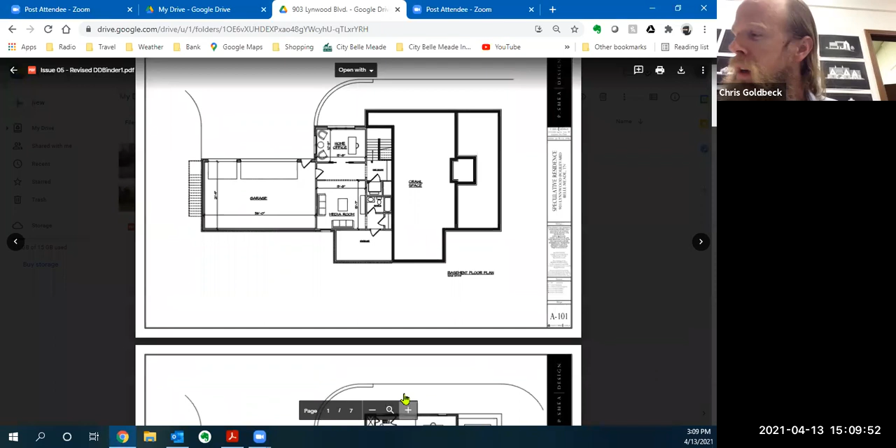Okay, this is Chris Goldbeck with Pichet Design, and I am back in the office this month, so hopefully my internet connection is better than it was last month. So I will just speak to the reasons for deferral from last meeting. Concerns raised centered around the overall height of the house, the space between the top of the dormers and the ridge, the roof form and volume of the back section of the house, the appropriateness of non-functional chimneys, and the shallowness of the roof pitch on the back porch.

So we lowered the roof pitch on the main house from a 14-12 pitch to an 11-12 pitch. This lowered the overall height from finished grade from 35 feet 3 inches to 31 feet 6 inches, so almost 4 feet. And it also reduced the amount of roof between the top of the dormers and the ridge.

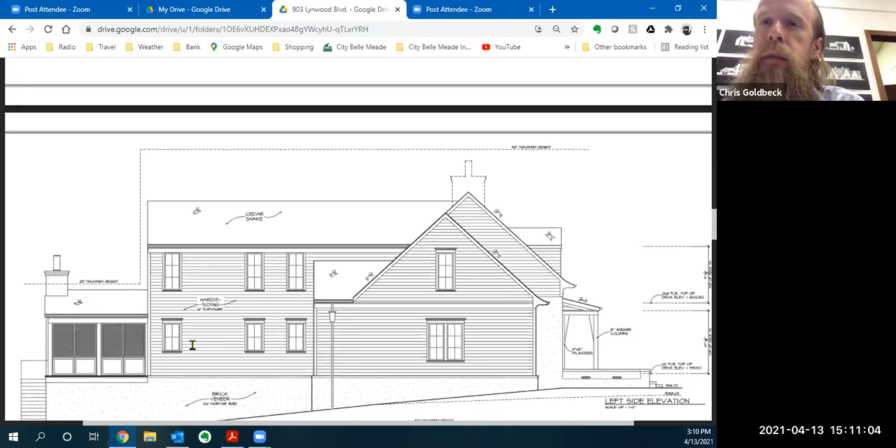On the back half of the house, we lowered the roof over the utility and stairwell to a 3-12 roof, as opposed to what had been a continuous hipped roof back there. And then we also changed the hipped roof to a gabled roof and lowered the pitch from 8-12 to 7-12, so that the back section of the house is more subservient to the main form.

In regards to the chimneys on the front of the house, we dashed those in as optional, and we'll follow the wisdom of the board here, but whether or not those are permissible, our preference would be to have those. I think it would be a nicer looking house on the street. I clarified with John Swift, the builder, and they will be brick, but we understand that if the board wants all chimneys to be functional, then we would remove those.

And lastly, in regards to the pitch of the roof on the back porch, I was unable to raise that pitch because of the height restrictions at the back porch. So that remained at a 4-12 roof. And that's all I have. Thank you.

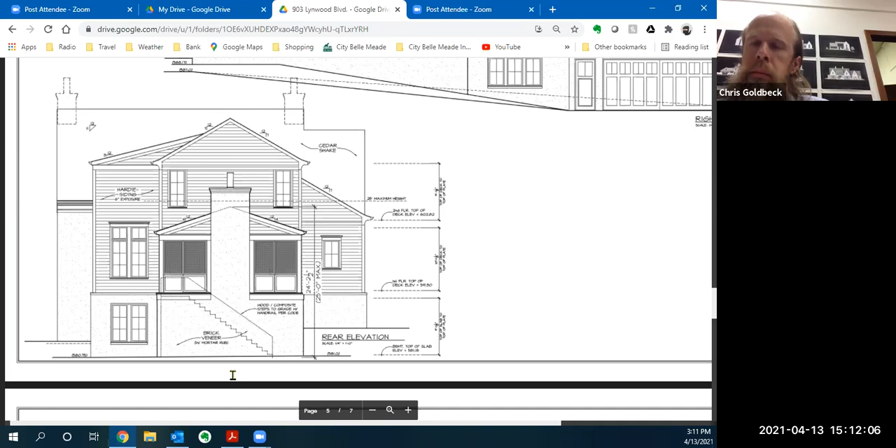Anyone else in attendance who would wish to speak? Yes, Stephen Mason. 4301 Warner Place, next door neighbor.

The elevation from the basic elevation is going up 3 feet in the front, and we're concerned about the amount of runoff rainwater that would send our way, since that house would now be substantially higher than we are next to it. I don't know if that's been a consideration or not. I was hoping they'd put a curb on their driveway to keep that water from running over towards us, since the house is being proposed to be raised 3 feet from natural grade.

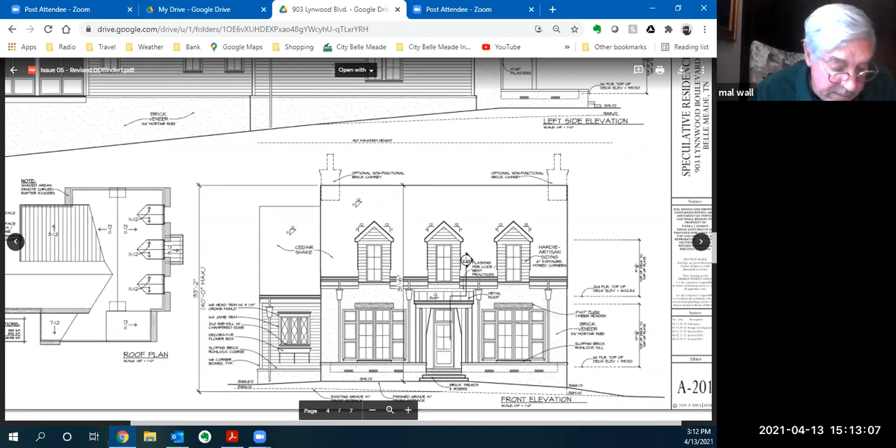Well, Mr. Mason, we on this commission can't address stormwater and stormwater management. That's a separate issue with the city.

Lyle, has the stormwater plan been made for this lot yet? Off the top of my head, I can't recall, but understanding Mr. Mason's concern, I'll definitely red flag this and bring it to our city engineer's attention. The stormwater plan will take into consideration all contiguous neighbors around this property. So Mr. Mason, thank you for your comment. I'll definitely flag that and send it to our engineer.

Can I get a point of clarification? This is Jeanette Whitson. For Mr. Mason's benefit, and this seems to be coming up a lot during our meetings, what are the appropriate avenues for concerned citizens who live around properties being developed to ensure stormwater is being addressed? I think we need to review this now because it continues to come up during our review and it is not part of our review. So maybe we can let people know right now, stormwater concerns should be addressed to whom - call, email? How should that be addressed by concerned citizens? What's the proper avenue? Who is that directed to, Lyle?

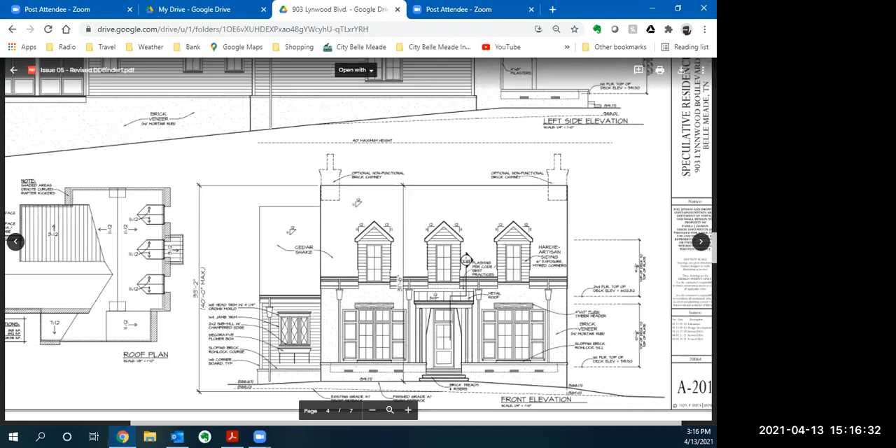Can I ask a question just for refreshment here? Can you tell me the architectural style of this house? Yes, it's French Norman. And can you define that for us, what makes it that? So within various regions of France, there is some variation in the different styles you'll find, and a lot of it has to do with the geopolitical dynamics of the area. For example, in southern France it may take on more of a Mediterranean feel.

This house has the Norman style, yes. So can you tell me what makes this house that style? Yes, having the gables reflects more of the English influence that is consistent with the history of Normandy, with a blending between the two cultures and styles. Oftentimes French houses have hipped roofs, but this one has a gabled roof to be in keeping with that style.

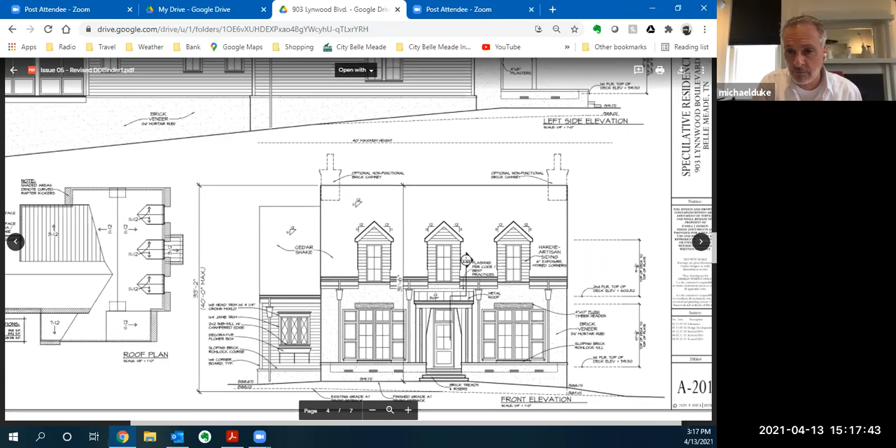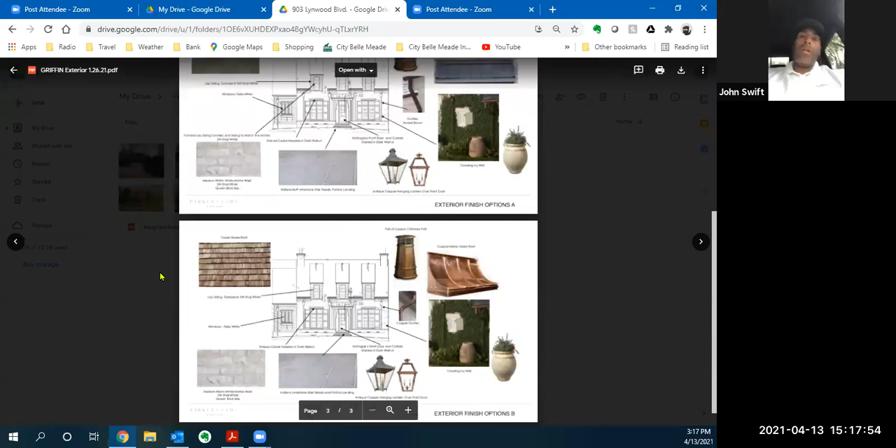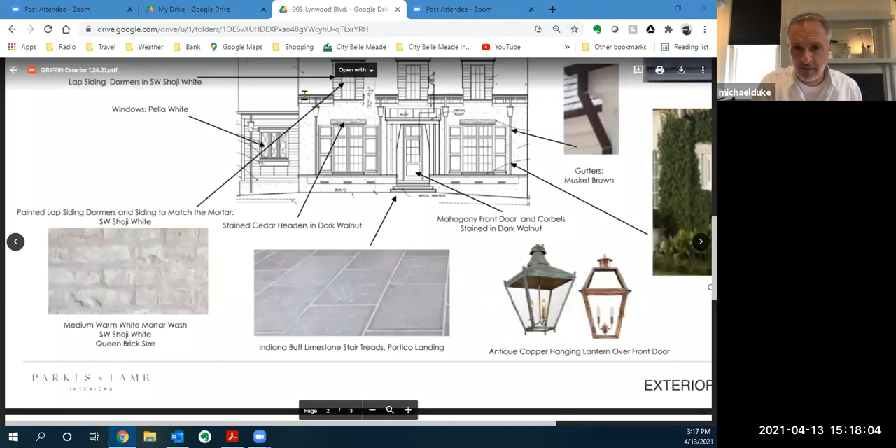Do you have an example of the brick that's going to be used for this house? Is that in the packet, Lyle? Chris, is that in the packet? I see mortar - something, it says medium warm white mortar wash. It's a wash on the brick. So is it going to be another white house then? Shoji white.

Can I see a side view of this? Is this the left side view again? There was... I didn't know, yeah, on that side. That was my question - the shutters are on the right and the front, but they left them out on the left-hand side. And it's going to be viewed on Lynwood from all three of those sides for sure.

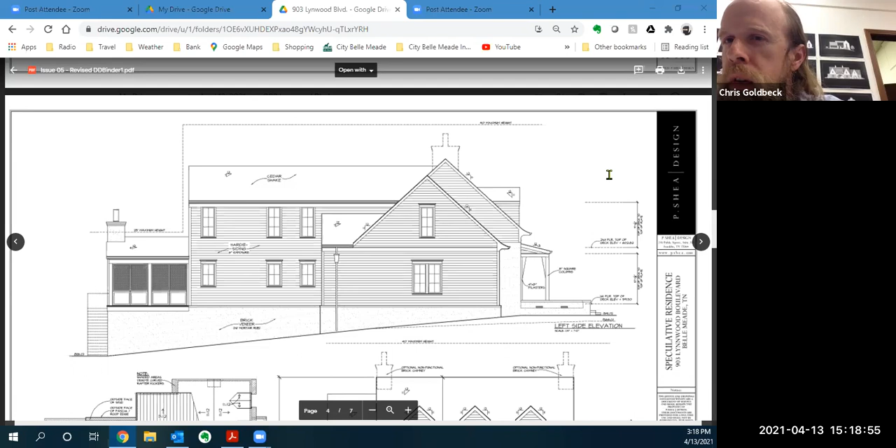Chris, you have a problem with putting shutters on that left side elevation? Are you thinking kind of towards the front, or the windows towards the back as well? Just the windows toward that main body of the front. Yeah, I'd be fine with that. Do you have any other comments?

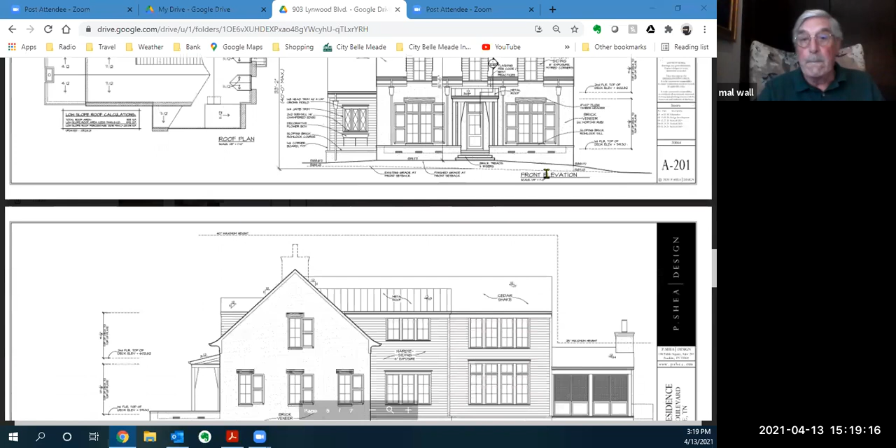Anyone else care to speak? I would like to comment to the neighbor that asked about the grade raise being in our overview. It is in our consideration as we look at it from a style standpoint, but the grading and drainage will all be part of the stormwater plan. So if they've raised the grade such that it's going to not pass stormwater, that will come back through stormwater review. Would that be accurate, Lyle? That is correct.

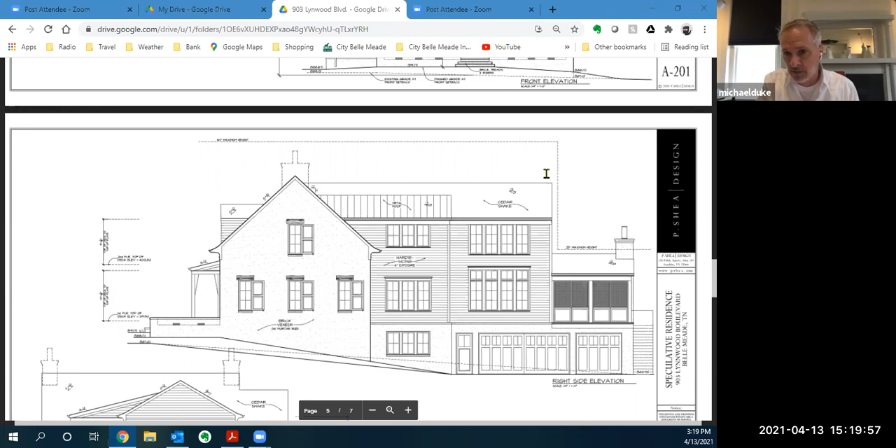Lyle, what is it if you change grade more than 30 inches - is that part of stormwater or is that part of your grading and BZA approval? It would be both. It's really a matter of BZA approval, but then you've got to pass stormwater after that. So you've got two hoops to get through, if you will.

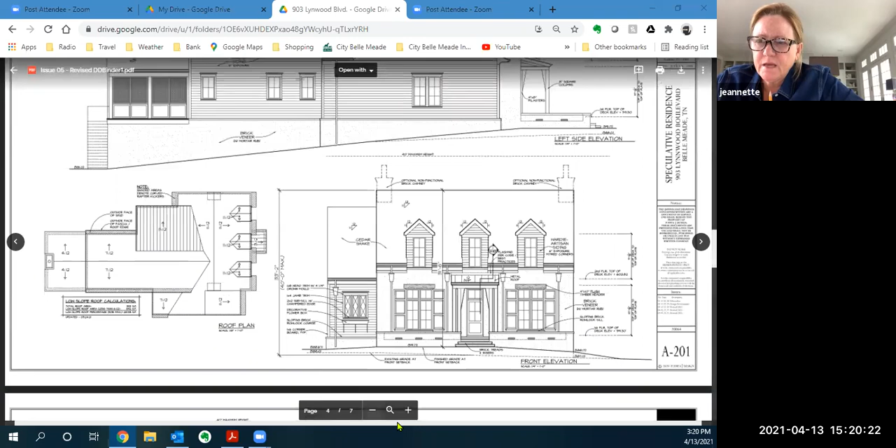And I can't quite see this, but where does the 40-foot maximum height, where are you measuring that from? And I know the house doesn't reach that, and that's what I also want to ask - how high is the house with this 3 foot, and where are you measuring the 40-foot height from? That's the dashed line in front, which is the average elevation of the front setback.

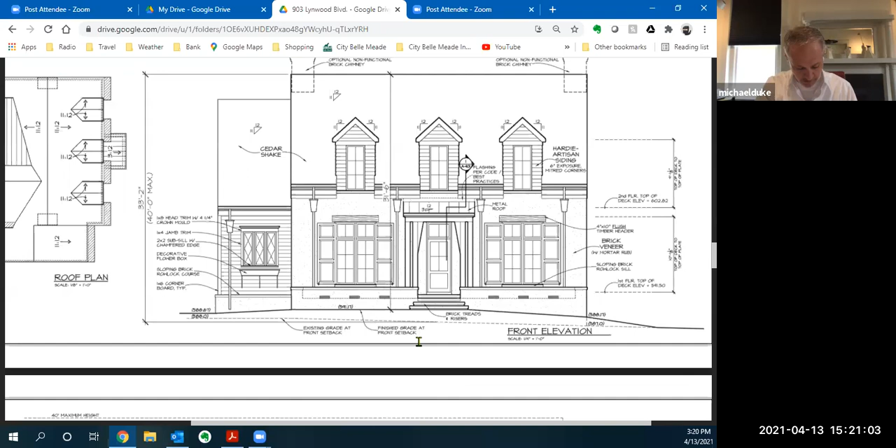And how high does the house sit right now? 33.2? Correct. Okay, so it's well under the 40-foot allowable by code, correct? Yes. Okay, so it's 33.2 from that average natural grade, then, Chris? Is that what I'm reading? Correct. Because it looks like it'd be about 31 and a half. Yeah.

Anyone else? I personally like it without the chimneys on it. It just seems like it's a lot more of a clean design. I agree with Gavin, taking those off - particularly if they're faux, they're not necessary.

Do we need to make that part of this approval, since it says optional on there, Bunny? Oh, we can let Lyle deal with it, I think. Well, we can say we'll approve it without them - is that what you're asking, Gavin? Okay, yes. We can make it a caveat of approval. All right, I should have made that question of the chairman. Apologies, Mal. No worries, no worries.

Can I ask a question? Sure. Little windows that are recessed on the - what elevation are you looking at? Front elevation. Okay, so this - never mind, I think I just answered my own question. Never mind.

Okay, let's close the public portion, and the chair will entertain a motion to approve the design with the modification of removing the chimneys.

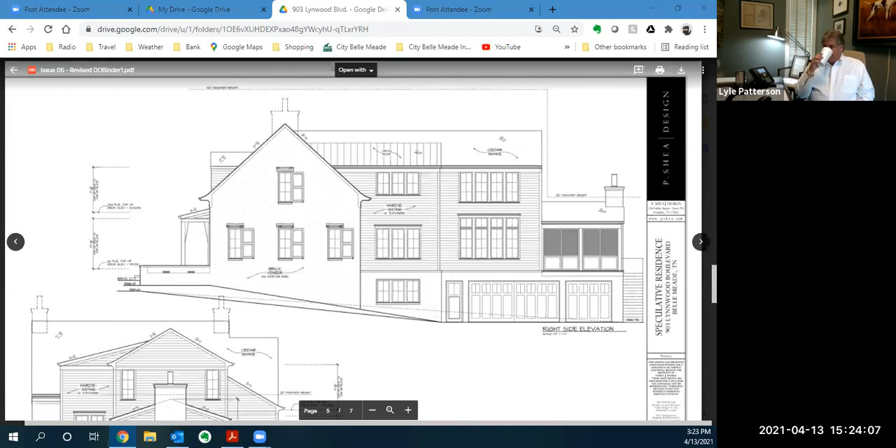How high is the basement ceiling? It is 9 feet. How tall are the ceilings on the main floor? 10 feet generally. Yeah, that's pretty tall for a supposed cottage, Chris. If you were to take a dimension from the top of that ridge down to the garage elevation, what is that dimension?

Well, look at the topo at the front elevation to the back elevation. That'll give you the footage to add to the 33 too.

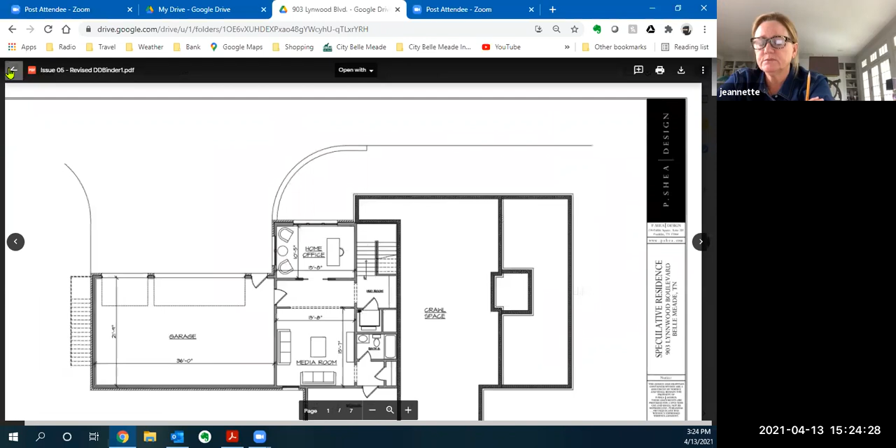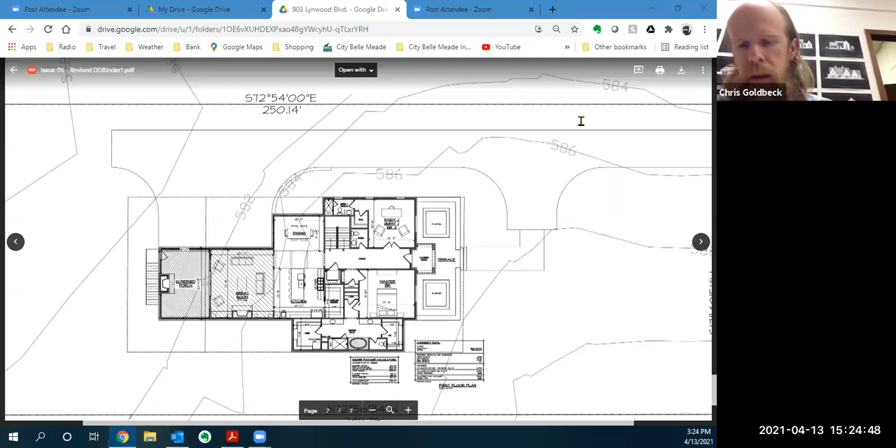I think it's just shy of 40 feet from the main ridge to the garage slab. So it's 40 feet. So you're still under the 40 feet, even in the back slope. Correct.

And I guess if I can answer the question about the grading. The way we position the house is set back 15 feet from the front setback because the grade does fall a little more precipitously as you get back on the lot. So we pushed it back and set the garage elevation based on the lower areas there, and went from there.

So we're building up the grade a little bit in front. On the front elevation, you can see the difference between the solid grade and the dash line there. We are building it up a little bit based on past projects with the board. We heard a desire for less steps at the front, so I built that up accordingly, but nothing falls outside of what's allowed with the zoning ordinance. I think it would be more attractive if it weren't 3 feet, if you didn't have to walk up 3 feet to get to the front porch.

I think those are tall ceilings for supposedly this cottage style house on the first floor. That's a big basement ceiling, high basement ceiling, high main floor. What's the third floor? Nine feet. Yeah, that's a lot of height there. And I think if you could lower it in the front, it would be a more attractive house. I think it's going to even look taller than 3 feet.

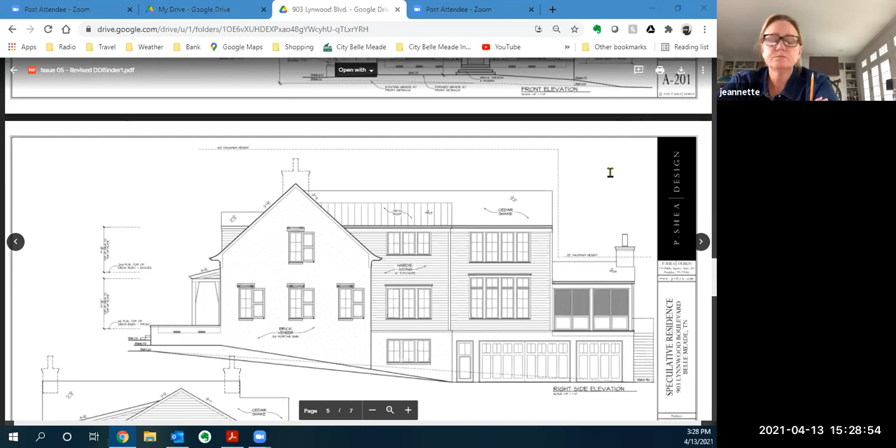Yeah, I know that I've submitted the drawings to the civil engineer to work on the stormwater and grading plan. I don't know if you've engaged a landscape architect yet. No, we haven't engaged anyone but the civil engineer at this point, for fear of not knowing what was going to be approved or the overall footprint once we finally got through. So no, we have not engaged a landscape architect or designer for this.

And can you speak to that? Would you be putting it in, or would the homeowners be putting that in? No, we would have to put it in.

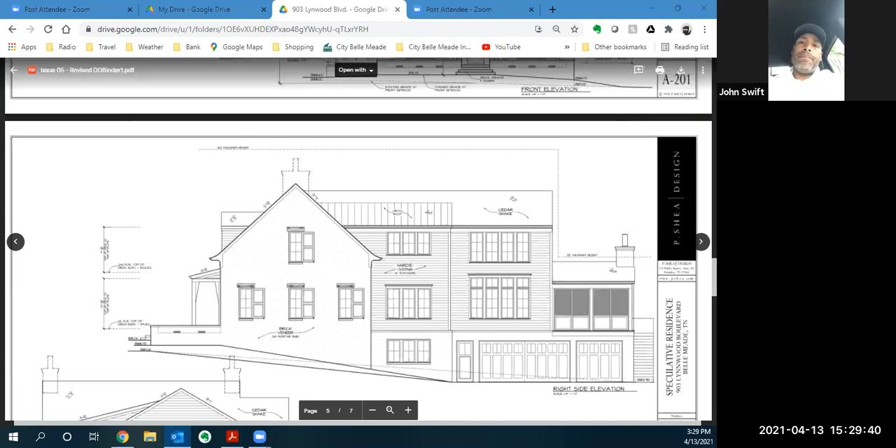I guess, is there a minimal requirement for this? Or should we tie some stipulations for the landscape? If they're not coming to the Board of Zoning Appeal for an overage and a grade change, then yes, I think I would tie a stipulation into that. But I'm just listening and thinking that if you guys are willing, with your submittal that could be reviewed, have a landscape that might reduce that sort of 3-foot bulk that they're referring to.

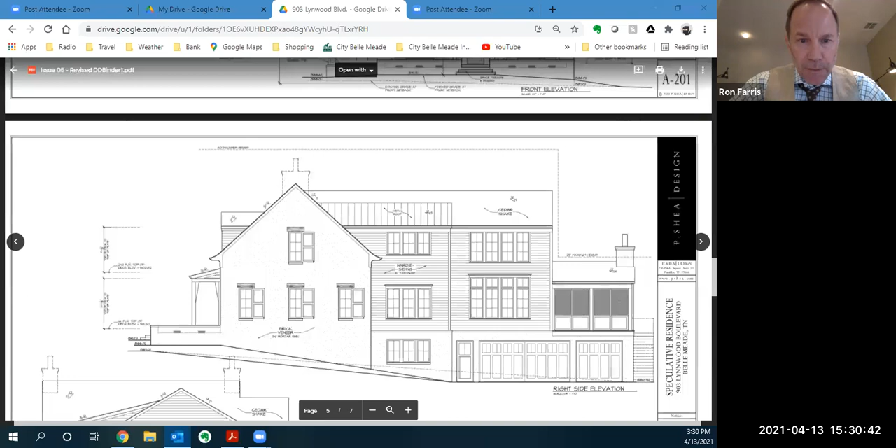I think, board members, this opens discussion about the level of site plan we're seeing versus the level of site plan I think is going to be required for this to pass through stormwater and address some of Bunny's aesthetic comments, as well as how the front of that house will knit itself into its landscape.

And I respect the applicant's comment about not wanting to take that forward until he knows stylistically about the project. I think in closed hearing we can probably all discuss that, but I think there are things that could be addressed.

Planter walls might help the fill component from average natural grade up to the proposed finished grade. I've found that a nice dimension to set off finished grade to finished floor ranges in that 24 inches to 48 inch range. That gives a house a base and a platform to set on, but how it knits itself back into a fill component and the view from the street becomes vitally important.

I think Chris has done some of that with that front garden area, or the walls that help create that. I could make an argument that those wrap around the side of the house to help mitigate maybe some of the height. I'm not troubled by the height.

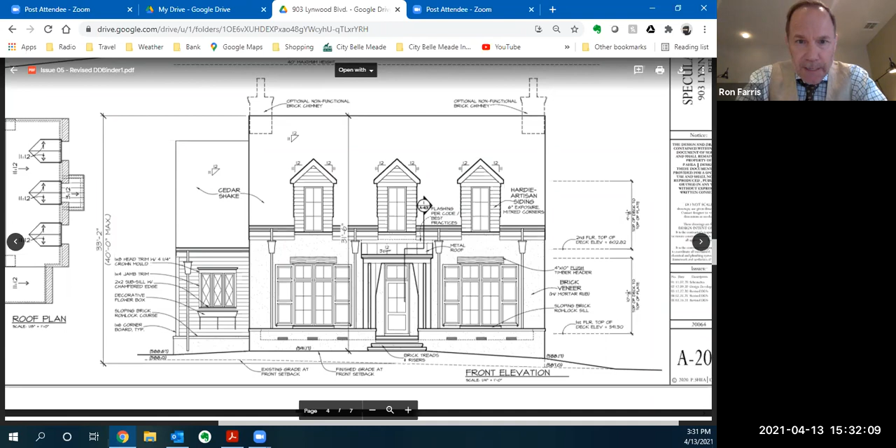When you look at some of the applicant's pictures, there are houses on similar streets that have this height or more. But I can't see, there's not a final grading plan. There's only existing topography. So the board can't tell what final grade's going to do, nor can Lyle advise if he's exceeding the maximum grade change, which I believe starts at 21 inches.

Does it not, Lyle? The building envelope, it is up to 3 feet, a total of 4% of the lot.

It's around the sides of this that they may be getting into some need for looking at grades. So could we tie some of our comments to that? I think we could, and I agree with Ron. I didn't have concern with the height. I was trying to flesh this out to make Bunny feel more comfortable, because we are looking at a stark rendering without the benefit of a landscape plan that lessens that.

I would want to approve this with some type of understanding that there would be landscape planning to minimize the impact of the raised foundation walls. Whether that's a height, I think it would be the screening for Mr. Mason.

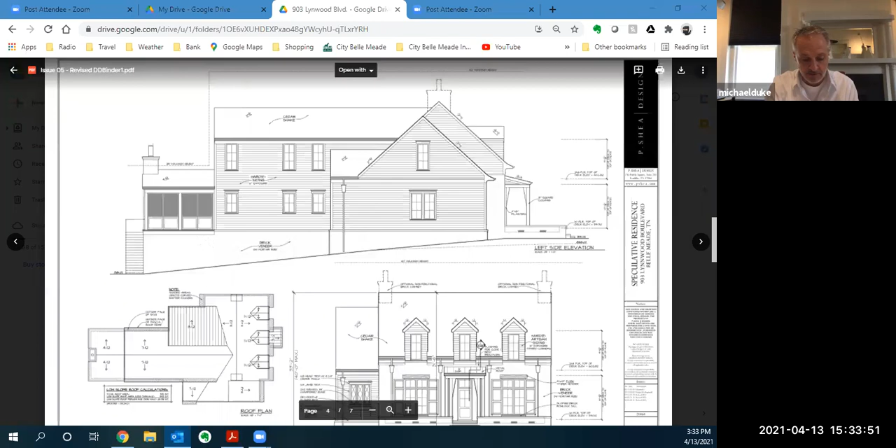What do you think about that? Because if you look at the site plan, there's a strip of grass that faces Mr. Mason's house. I agree, and I'm more concerned—the front is okay for me, but the side has a 40-foot dimension coming into this garage. He's already uphill from Mr. Mason and he's looking down into his property. So that strip in between the drive, I would like to at least see some benefit for planting to happen there so the neighbor doesn't have quite as much of an impact.

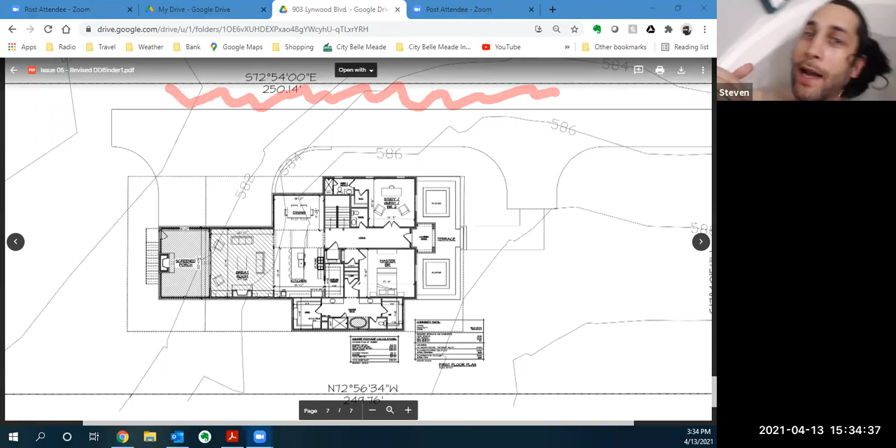I'm in a bathtub, I'm in a bathtub, I'm in a bathtub. What the heck? Who is that? Wow, I think we've been pirated. I think we have a hacker. Wow. Anybody wanting to get on that's not next on the presentation, I hope. The historic committee really doesn't have much of a life, do they?

Well, the chair will entertain a motion for approval with modifications—landscaping and the additional shutters.

Bonnie, did you have something you wanted to say? Just the roof material change—why did he change the roof material on that one section? It looks like there's a metal roof on Mr. Mason's side in one section. Can you go back to the roof plan?

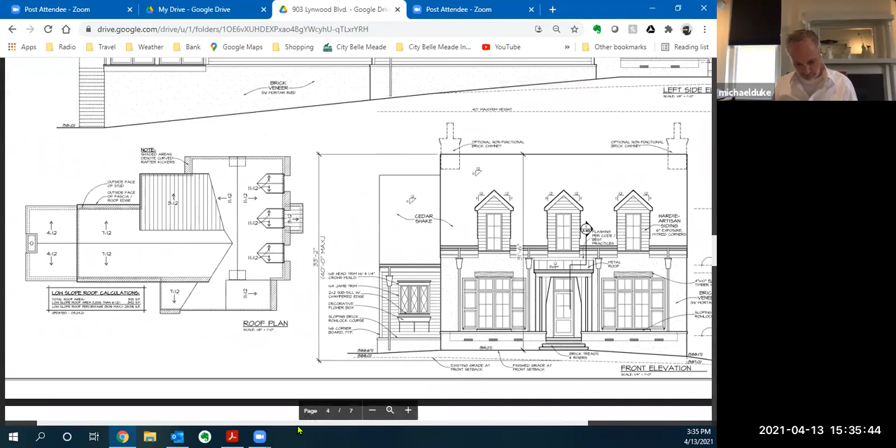I think that's addressed—it's just a copper shed. It says metal roof. What's the material? Yeah, I have copper on the exterior finish options B.

I think that looks pretty. And it's pretty high up there, I don't see it as copper as well. That's a shallow roof, it's a 3:12 pitch, but it is going to be cedar shake.

Just make sure we got that in the approval—cedar shake the whole roof. That's what's on the material list. Right, so that's a 3:12. Okay.

I think the exterior finish, that presentation looks very good. I will tell y'all, I continue to be concerned just at the height of this relative to the other houses. I'm just trying to envision if there are any others that are 3 feet above, just with the topography of this lot, if there are any that go up that on the whole street.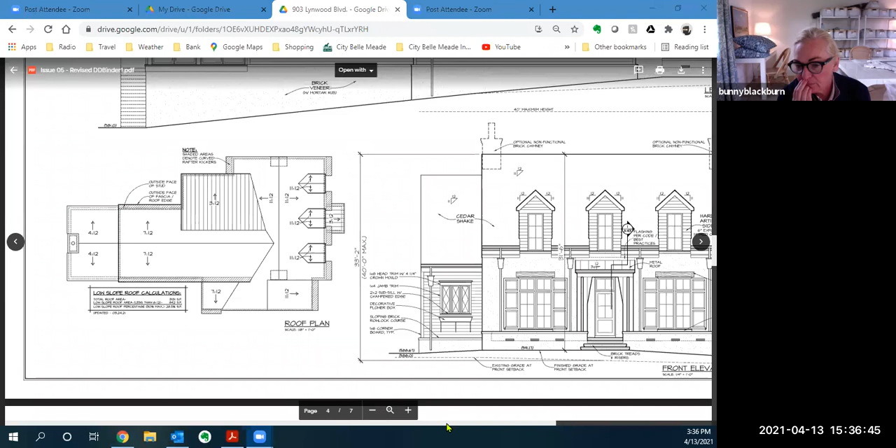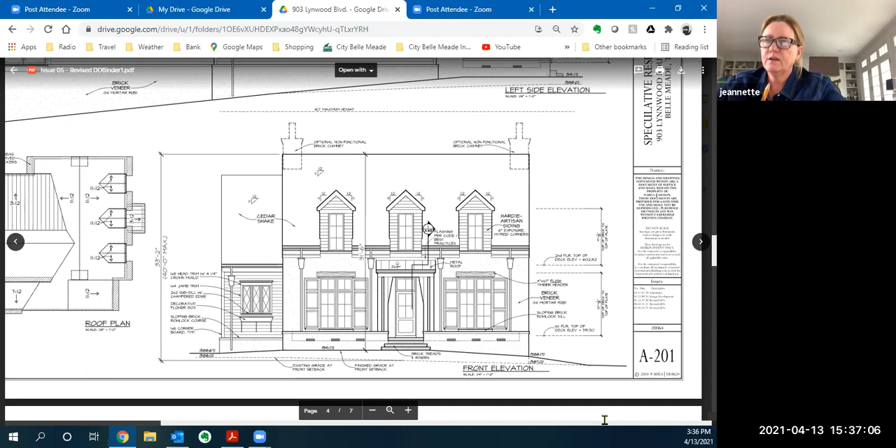That's a concern for me because I think it's exacerbated on the side, and that's why it's 40 feet tall, way above Mr. Mason's house. But 40 is allowable, until the municipal planning commission decides they're going to do a case by case for different lots. Yeah, but it's still, look at other houses on the street too and heights of those.

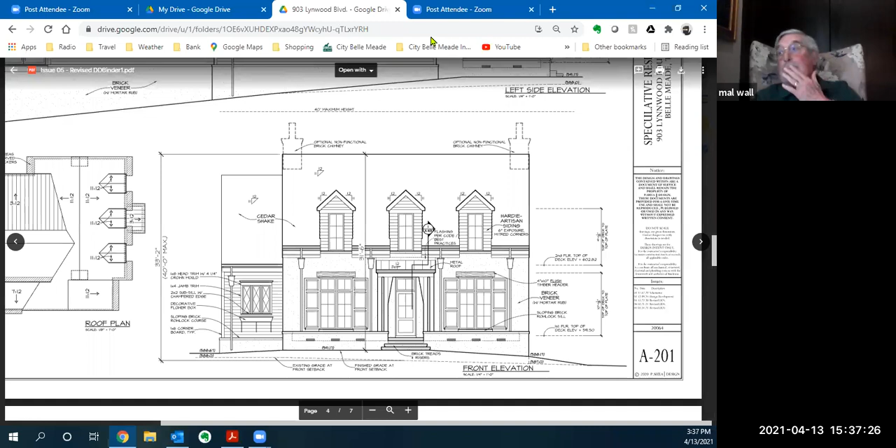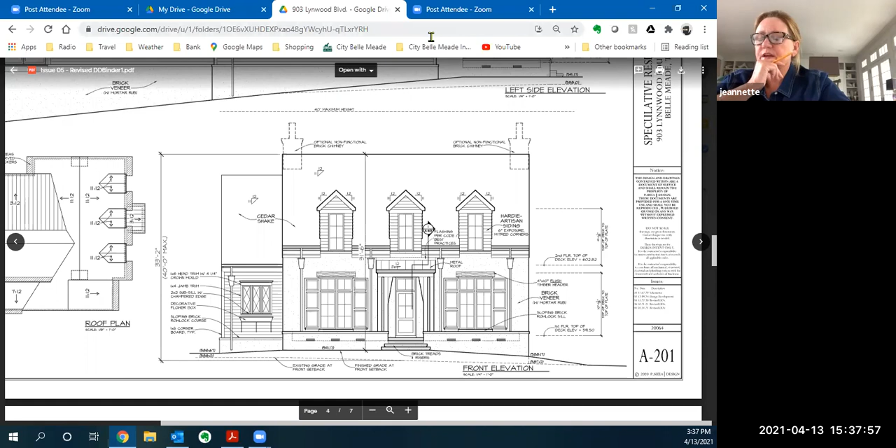Are you looking for a motion? Yes, I'd like to make a motion that we approve this with the stipulations of the landscape, the shutter on the left elevation. Was there one more? What was the other one? Chimneys, yeah, we're going to eliminate the two chimneys and make sure it's cedar shake shingles. And let's make sure it complies with the exterior finish option list that was presented. That's my motion. And I'm going to second that motion.

All in favor. Gavin, aye. Bunny, no. Jeannette, aye. Ron, aye. Mal votes aye.

First item under new business is the application for a certificate of appropriateness for Anthony Tabacoli, 510 Park Hill, for demolition of existing home, which is a property of significance.

Is that you, Anthony? It is. If you'll call out whichever thumbnail, I'll pull it up for you. Can you see your screen? I can. Okay, I'm getting ready to share. And there you go. Should I go? Yes. Okay, thank you so much for letting me be up here.

I'll be very brief. I know the owner of the property is also online with us, and if he has a comment or two, I think he may. Generally, I've got this property under contract with the owner. In its place, I plan to build new construction, a single family home, highest quality that will blend with the character of Belle Meade. The subject property is approximately 2,600 square feet, on about an acre, a little over an acre. The original part of this house was about 1,770 square feet, built in 1925.

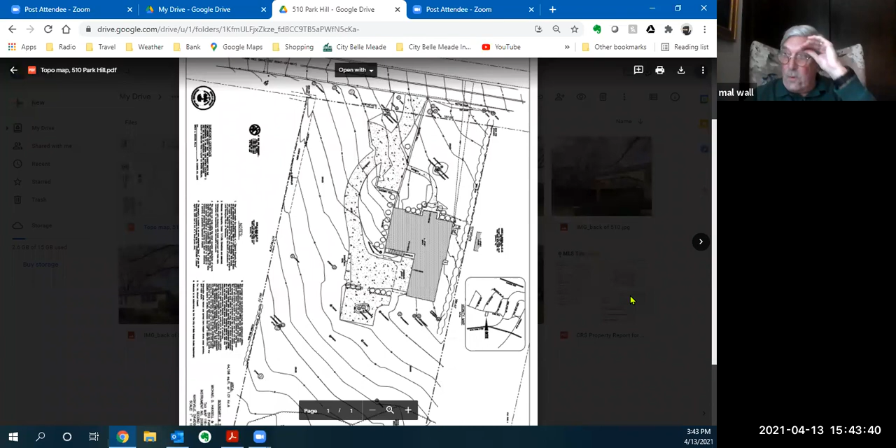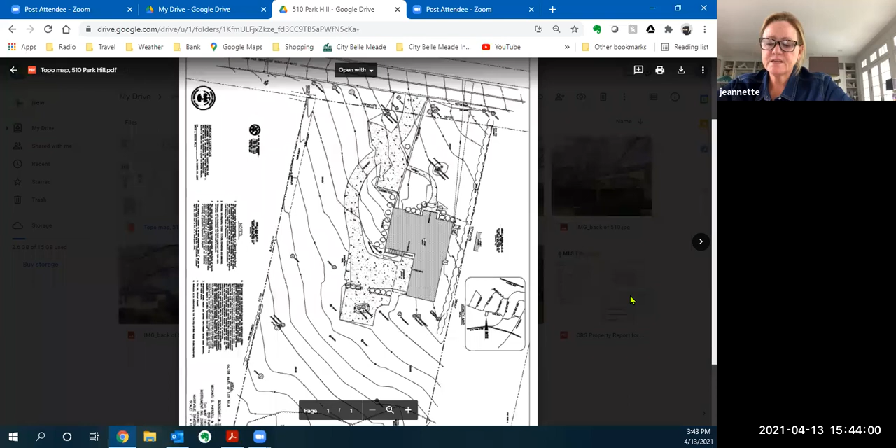I will just say, I do think we should have a discussion of why or why we shouldn't approve it. I think it should be approved. I don't see anything excepting the date it was built that makes it an architecturally worthy structure. I would defer to Ron, it has a cottage appearance, but I believe it has been altered over the years and does not, in my eye, seem anything worthy of conservation.

I'd like to disagree with Jeannette. I think it's a lovely cottage. I think the way it sits on the lot is very attractive. I think this is a house from the 1920s. I understand there have been some changes, but very few houses make it 100 years without some changes. I think it is lovely and would be a great house to renovate. Preserving these old cottages matters, not every house has to be a big spec house in Belle Meade. This could be a lovely cottage to be renovated, and I do not support demolition.

I guess my question would be for Lyle, do we have proof that this lot has been combined? Is there something on the survey that has it as one lot? Well, this is a typical rubber stamp for the planning commission. A lot of these pieces and slivers are throughout Belle Meade. A lot of people think they own one lot, they've been paying property tax on one lot, but when you actually look at the Metro GIS, it's a couple of lots combined. We've been asking people almost monthly for several years to combine these lots to close loopholes. So technically, it is one lot. I'm not sure if it's been officially combined, but that's a matter for the next owner and the planning commission. They cannot build two houses on the property.

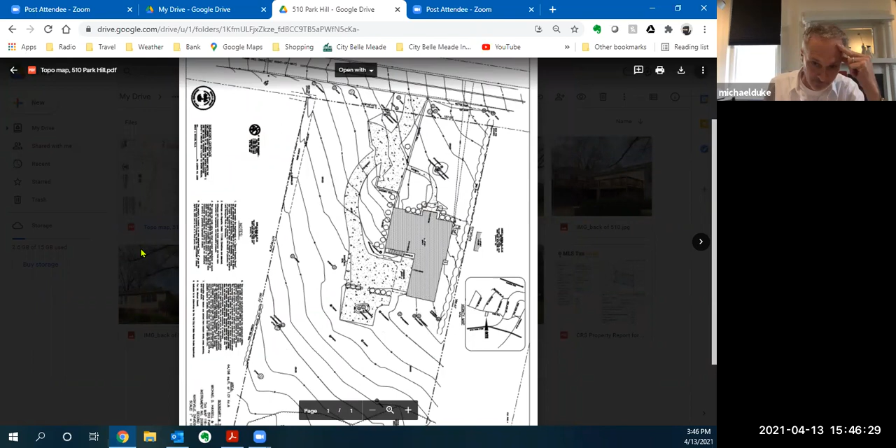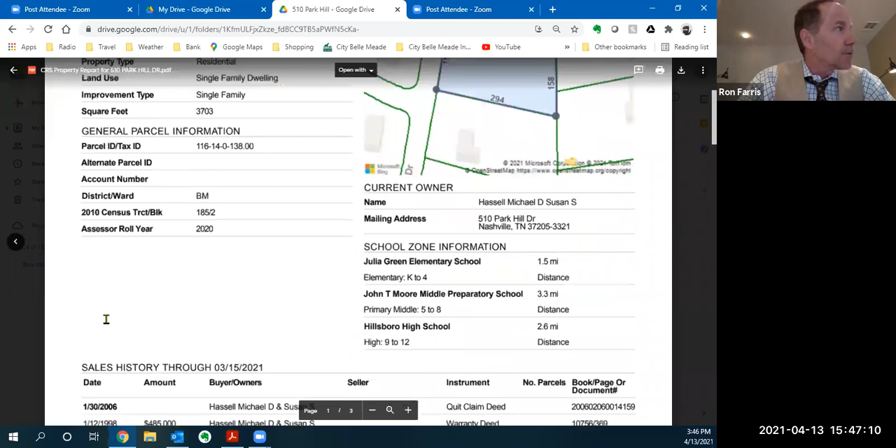I've been by the house and I've been aware of it. I've worked on this street over the years, and on the all-stone house across the street from it years ago. As a study of craftsman bungalow, I don't find it checking many boxes that I'd put into a category of significance. I don't see exposed rafter tails. It appears to have had multiple improvements over the years, replacement windows, replacement siding.

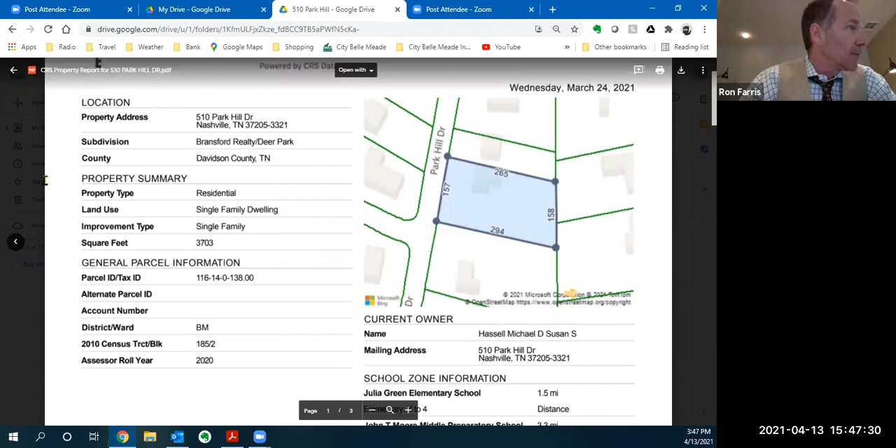I'm struggling, and I've been by it since the application was made just to look at it. I haven't walked around it, because that's something I need to ask in advance, but the addition is not a complement to the original structure, in my opinion. It's utilitarian as a bungalow, in my viewpoint.

I think we're looking at the addition, which is on the right side. One thing the board might choose, we could go through the list that places it in the category of significance. I think we should go down the list to be thorough.

Are we still in a public hearing, or are we closed? No, I think we're still public. Is anybody here to speak in addition to the applicant and the current owner? If not, let's close the public portion, and the chair will entertain a motion for approval of the demolition.

I would. Any discussion? I think we want to go through the list just to make sure we're being thorough. Make the motion first and then we do the discussion. Oh, okay. I would make a motion to defer.

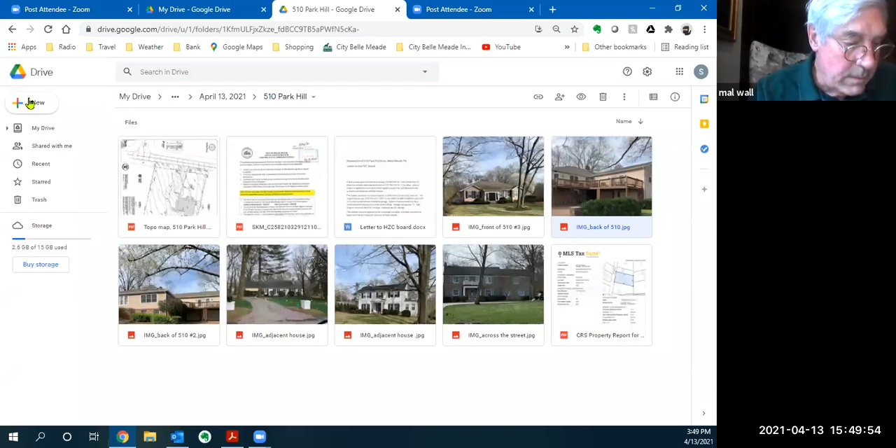I'm open for discussion from the board members, but I think we've had this conversation before, that it's not upon us to make the applicant's case. Is there a package included with the submission? This is everything. We've got pictures of adjacent properties, the current property, a letter, and a site map, strictly for demolition approval.

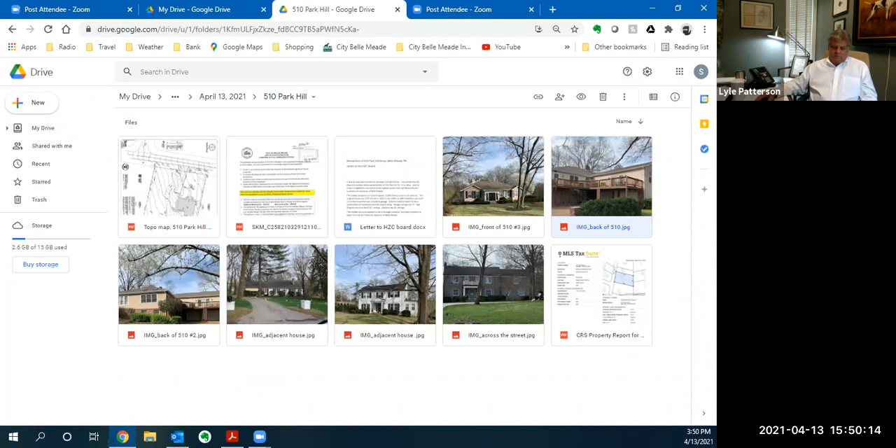Ron, make a motion to defer. Ron did. You may second it. Yes, I would like to second the motion to defer.

Jeannette, do you want to do the listing? No, if we're going to defer, I think that's what Ron was saying, let the applicant do it instead of us. Okay, so Gavin?

May I add that there is a part of the package that goes through the criteria on page 4 of the application?

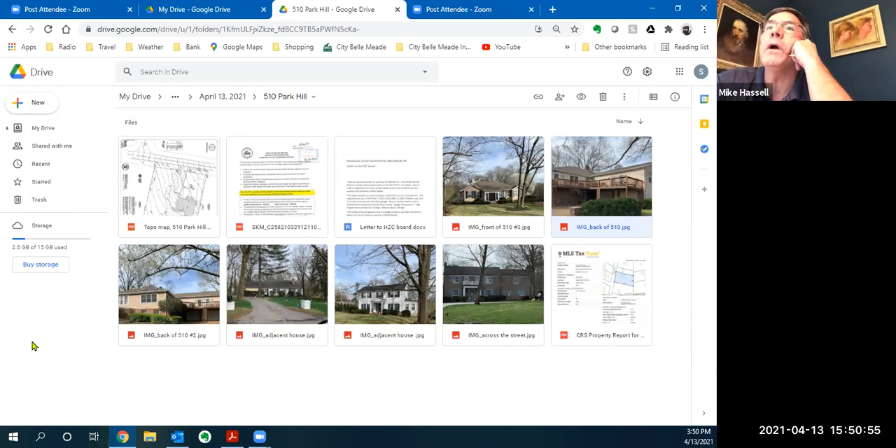The board would like to open it back up for him to make a presentation. I would entertain that. I would second that. I would, Mr. Chair, agree. Consent of the board? Yes, yes, okay.

So, you want me to lead this? Generally, properties built prior to 1939, and it clearly was. Does it possess integrity of design, materials, workmanship, setting, location, and association as defined for eligibility for listing in the National Register of Historic Places? Probably not.

Does it embody other qualities and characteristics that in our judgment should be considered significant to the history and architectural context of Belle Meade? I don't think so. I disagree. I just think it's a very nice cottage in a cottage area of Belle Meade, and I think it represents an important period in our history and the development of Belle Meade. So I think it does make that.

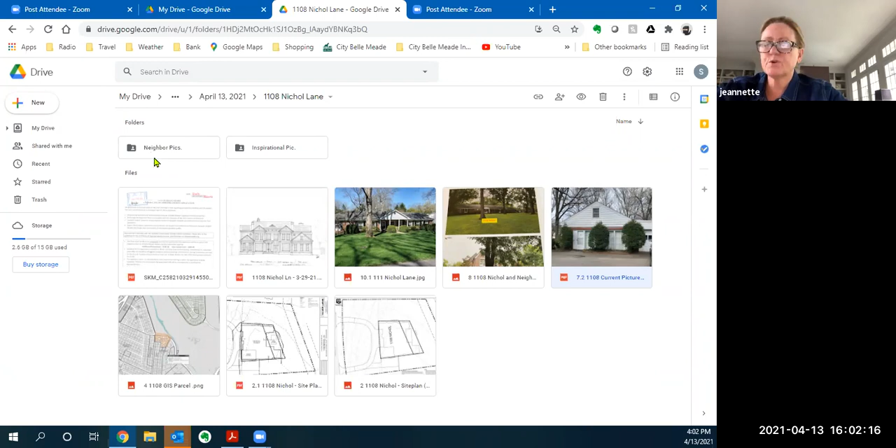I think what I'm asking is what we asked the previous applicant to do, is to go through their certificate of application and present it to us. And that's only for the demolition, correct? Correct. I do not see... I just don't see it in my documents.

Billy, you want to comment on this? Yes, if you could tell me what specifically I may be missing, I'm happy to try to address it. It's filled out completely. Okay, I see it now. I was just getting the first page before. It may have taken a minute to load.

Is there anyone else in attendance who would like to speak for or against this project?

I'll just say a few words on the plans. Beyond demo, what we're planning architecturally for the lot, we're going to really try to keep to a very classic colonial Georgian architecture, probably white siding, like real cedar painted white with brick or stone foundation, most likely copper gutters. We're trying to keep it very custom, high-end, classic design, fitting with the architecture of the neighborhood and community.

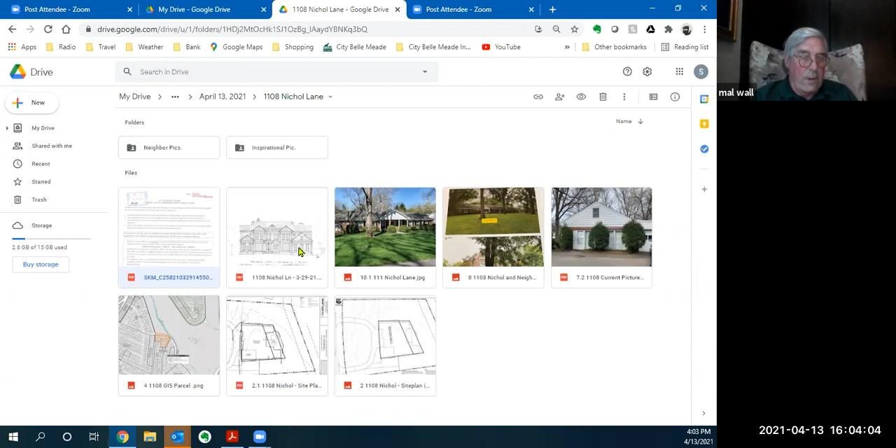I've been by the residence. It's a ranch, a simple ranch, not of high standard. I'm sure it was a nice house in its day, but I don't see it presenting a style that, in my opinion, I'm deeming worthy of conservation.

Yeah, I went by it also. It's a 50s ranch house.

I'm in agreement with both of you. I went by it and did not see anything that I felt was architecturally significant.

Is there a motion at this point to approve the demolition of this house? I'd make a motion to approve. And a second? I'll second. Okay, so let's vote. Gavin? Aye. Jeannette? Aye. Bunny? Aye. Ron? Aye. And Mal votes aye.

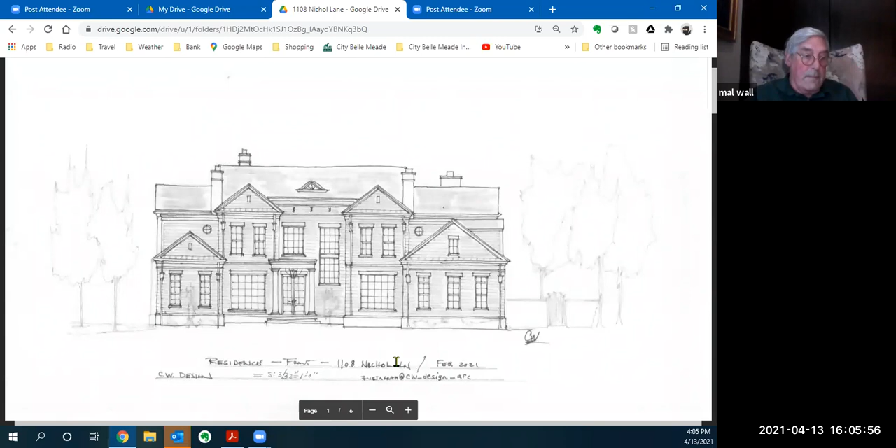All right, so 325 Walnut. No, we have another one. Oh good, I'm sorry. So on this one, Mr. Chairman, are we not looking at the plans? It was just for demo, they're not presenting for a new home. Is that correct, Champ or Billy? Yes, that's correct.

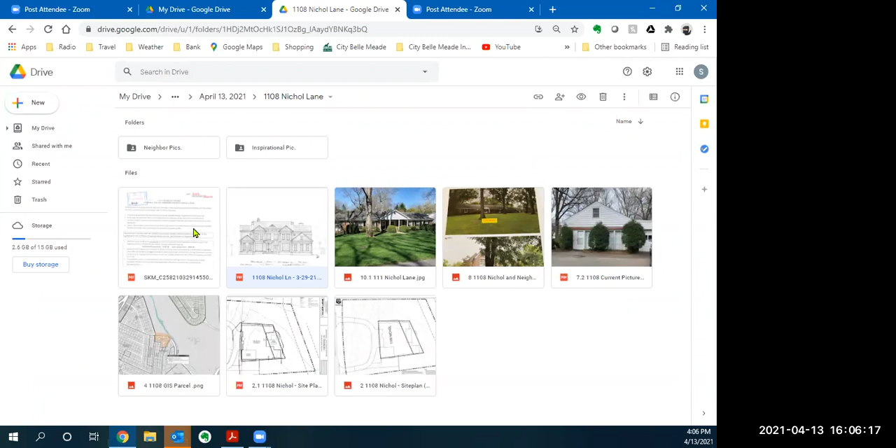All right, next item under new business is the application for certificate of appropriateness for Dave Arnhold, 717 Westview Avenue, to construct a single family home. I'll share my screen here shortly. This is on a vacant lot.

Hi everyone. Hello. Hey, this is Alex Darsinos. I think most of you guys were on the board from the last time we presented, maybe about 4 months ago, so it might be a familiar project to most everyone.

We'll start, Lau, are you waiting for me? Yes. We'll start with the Westview project package, the fourth item here on the Google. So we'll just run through a little bit of the project and the style and the inspiration images, along with our own renderings and the material package that we are presenting to you guys for the design.

Currently the lot is right under 2 acres, and a lot of this information we discussed last time, and the conclusion was that there would need to be a more particular choice of style and direction, and more information given to you guys in terms of the overall design package. So we've dived into developing the design closer to a particular style, and then also developed the project itself, which we'll show in a little bit in terms of details and materials, especially for Ron. I think Ron Ferris was asking for a lot of that kind of information.

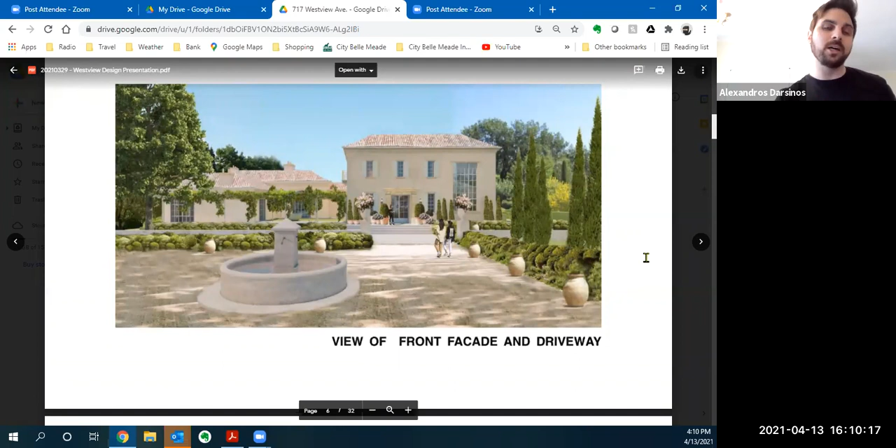We're also proposing, sorry Lyle, just as you sit on it I keep thinking of more details, in the last image there's a pergola proposed with landscaping to soften some of the facade in the front. And obviously we want to incorporate a very authentic fountain from Provence, not shown in this rendering as renderings are always difficult to show everything perfectly, but probably in the hexagonal style in the front as well.

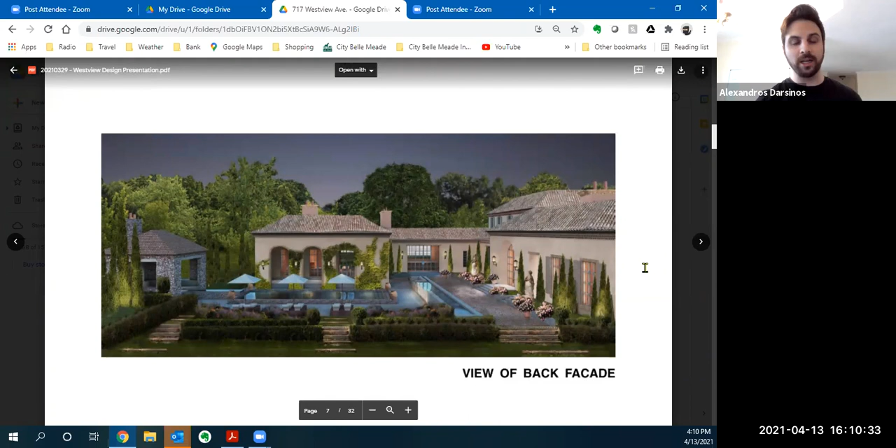So the next image, Lyle, shows the rear facade looking from the neighboring lot in the rear. We have a pool that braces the axis of the house, and a covered area with arches that are softened, very much in the Provence style, that embraces a covered area and also has large steel windows and doors behind it for the living room. We have a pool house proposed, mainly to hide some of the rear garage of the lot that is right behind us.

And without that pool house there, with no vegetation, the garage is kind of fronting this property. As we try to create an oasis in the back, it's very important for us to block and shelter the pool area and the outdoor courtyard area.

Again, with the barrel tiles, strong stucco, and working on the window arrangements as the main features. And we have shutters designed as well. We can go to the next image as well.

It's the same space, just looking from the pool house back to the house, trying to incorporate a lot of landscape, like hydrangeas and Provence style, with authentic vases and little features and stone around the pool as well.

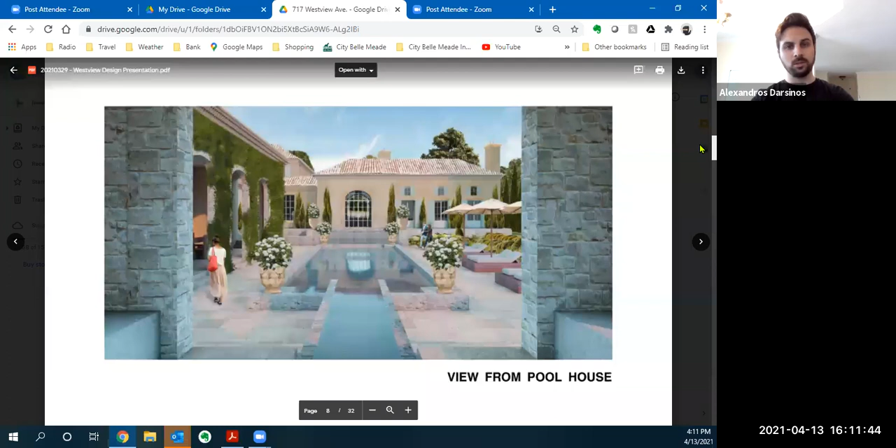We can go on to the next images. So this is the site plan that was created by our landscape architect, showcasing the entryway, showcasing the pool in the back, and the footprint of the house on the lot itself in the grade.

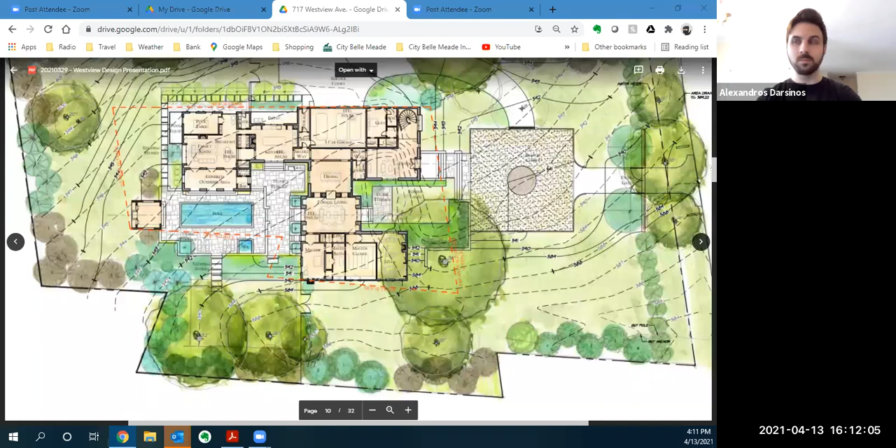The next image, we can just keep going through, is the floor plan. And the floor plan is changed slightly, but not as much as we expected after our first meeting. So we kind of toned in a lot of the comments and worked on the architectural mostly.

The elevations, we incorporated the hipped roof that has a flat portion behind it, but still has an authentic look of being a low gabled, low sloped. I think it's a 4:12 pitch hipped roof with those authentic barrel tiles all around.

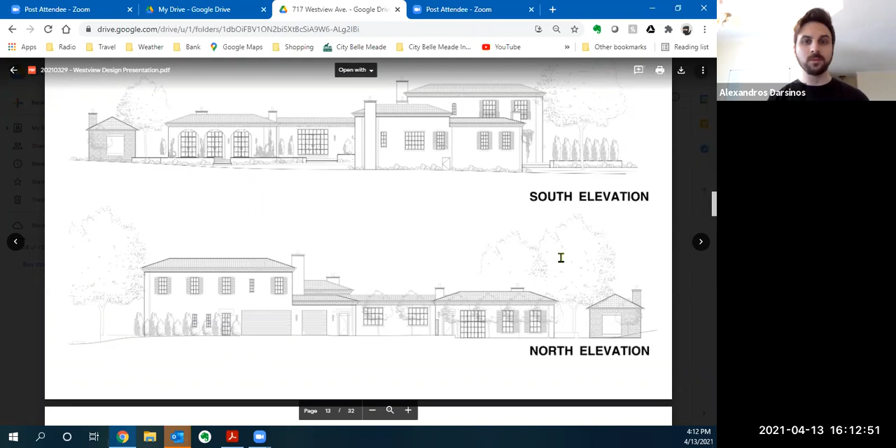That's the main feature for the design and how that works with the stucco facade. This is the front elevation and the rear elevation.

We can show in the next images, I think we're starting to show a little bit more of the materials. So these antique barrel tiles, like I said, we have a whole shipment of these already delivered to us at our office. The house in the bottom right is actually a house that the developers already completed.

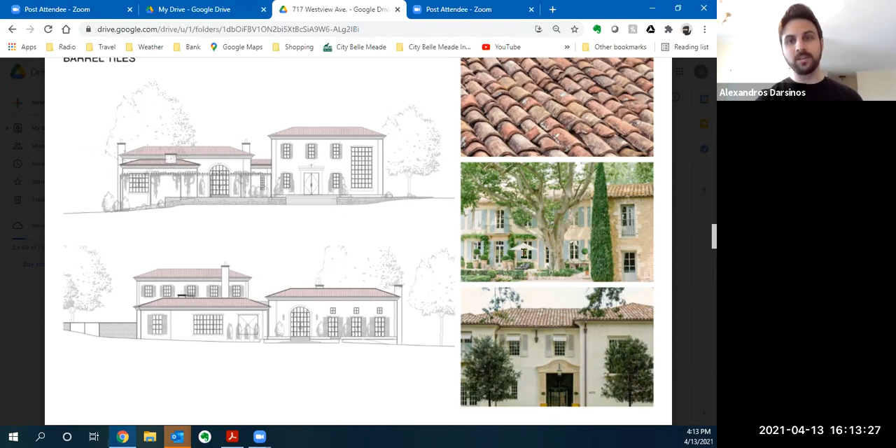And in Texas, it showcases again some of the details we're expecting to complete at this project as well. And the top image, we're just really showcasing the antique barrel tiles for this page.

The next page shows the cornice detail that will go around the entire building, the entire house. So we're working on that detail currently with stucco and structural to make sure it feels authentic with a stucco facade.

And all of the walls, if we notice on the floor plan too from before, we've doubly thickened all the walls. So we have at times over 2 feet of thickness on our wall thresholds to create this very authentic feel, so the stucco will feel more like masonry stucco instead of troweled on.

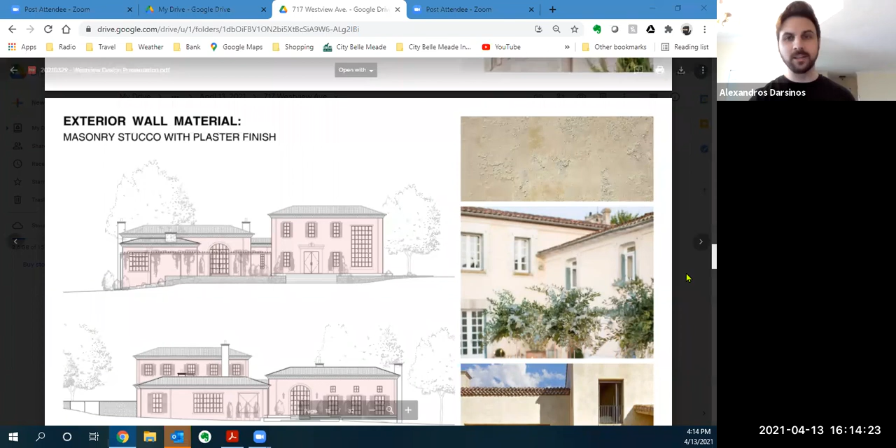Yeah, that showcases the masonry stucco with plaster finish. We want it to be kind of Venetian in style, a little bit smooth, a little bit rough. We're doing another project like this currently, not like this house, but with this kind of finish. So we know we can achieve it here.

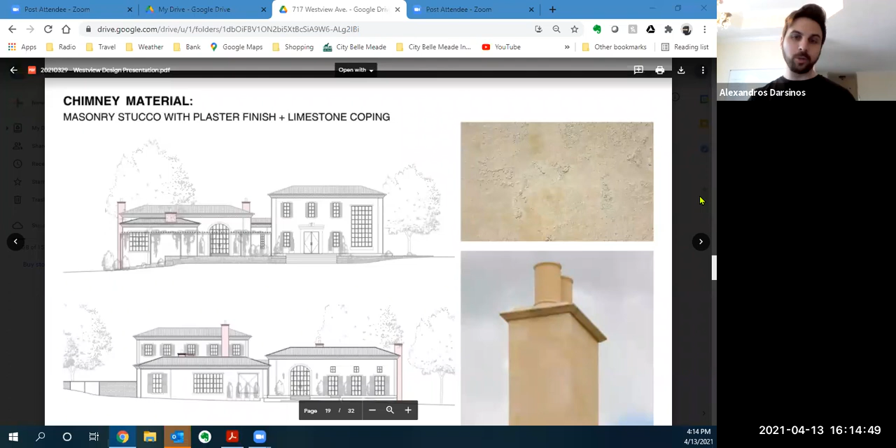For the chimneys, I know those were also an important aspect. We're looking at something a little bit more minimal with a limestone cap across the top and clay flues that kind of mimic, and maybe are painted in the soft tone that's the same as the stucco itself.

We designed a few retaining walls and moments that not only add a roughness at the base, but also are important for the elevation changes and the overall footprint.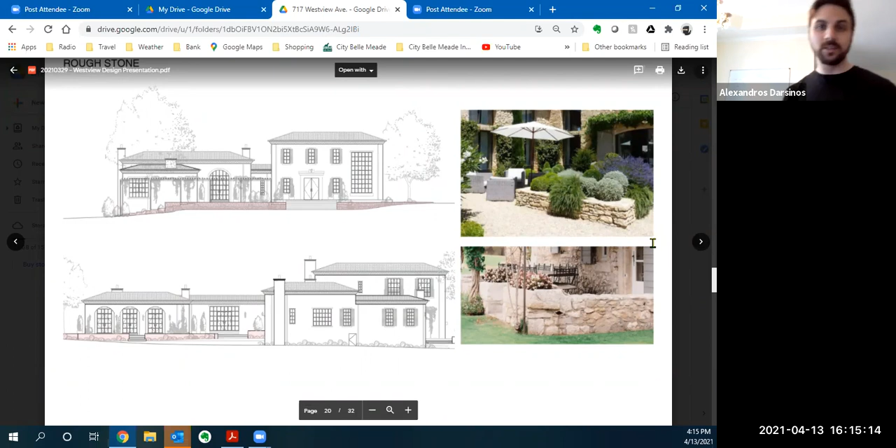This showcases the windows. So some of the smaller windows, we probably will do more of a simulated steel window package. We're looking at something a little bit atypical. We're looking for more of a lighter window package, which is harder to find.

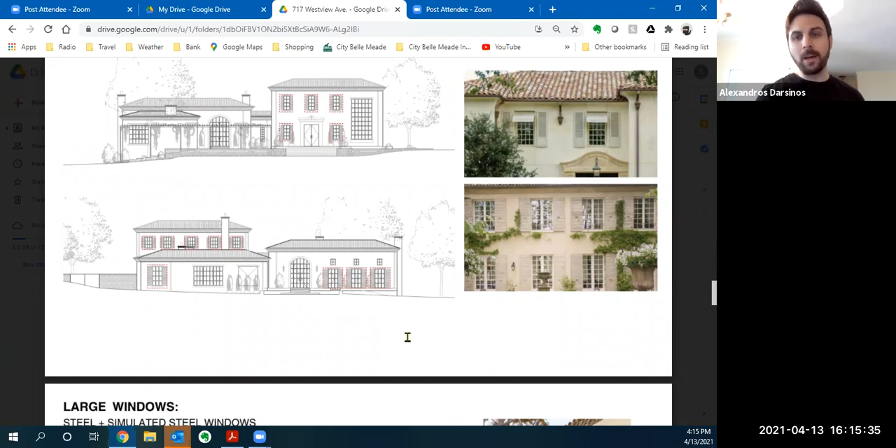So a beige or white or even a pistachio-ish color is where we're at right now, to kind of soften the facade and not have any strong contrast.

And the next image, for the larger windows and for most of the operables, we're hoping to execute them out of steel. We know steel's very expensive right now, but we have some early bids back and we think we can achieve that with our current budget.

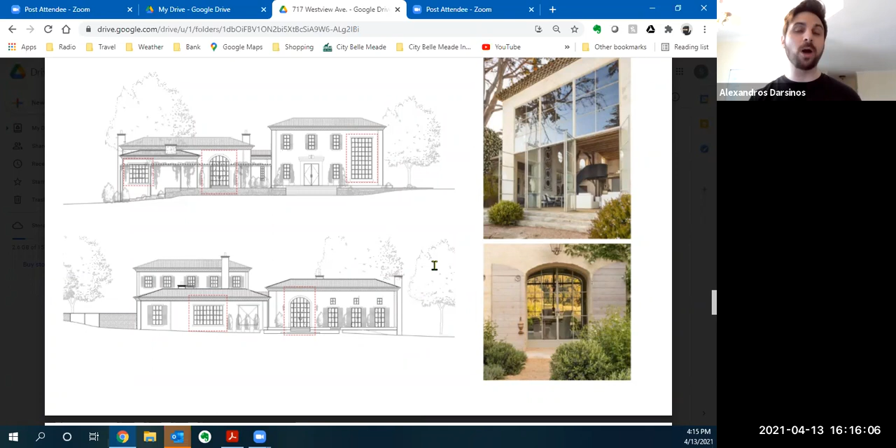So mainly some of these bigger units, and then also the ones, especially in that formal living, where you have this arch window that operates, and it's a very important aspect to go in and out of the house. And again, it will be done in the same color and tone as the smaller windows.

We have 2 balconies from bedrooms up on the 2nd floor that we think will add some character to the interior courtyard on the front as well. And we're just showcasing how we're planning on achieving that, and we can see that in the details as well in the design package.

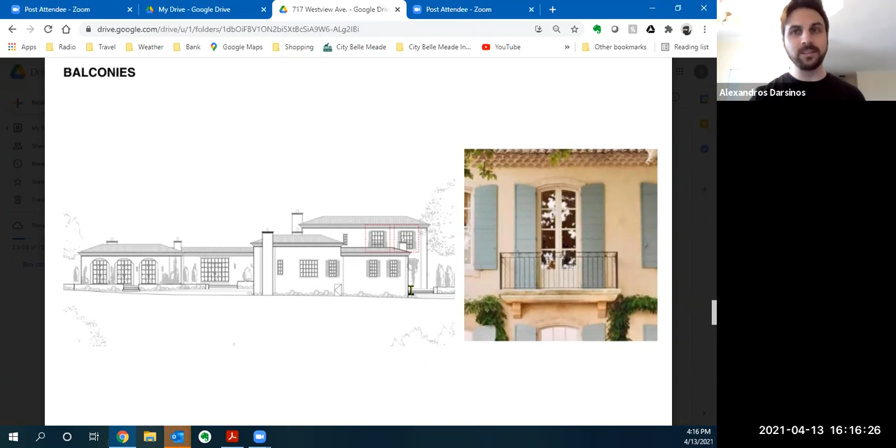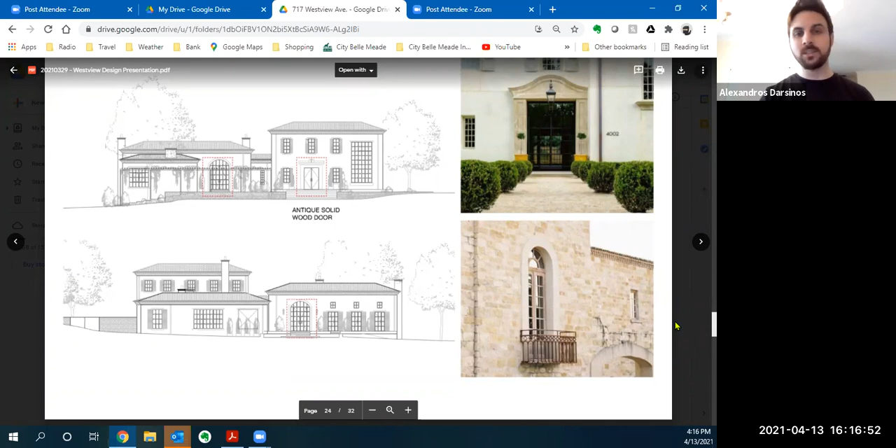This is about the door surround. So again, that project on the top is one our team has executed in the past, and it's limestone that we're hoping to bring similar tones to this project. The one on the bottom is more of a minimal limestone coping that we're looking at for the larger

arch openings, two in the front, one in the front, one in the back, but in the same tone as the other limestone. These half rounds will hopefully be done out of copper. It's not shown specifically on this image, but we'll have a detached catch basin with a copper downspout that gives a more authentic look on the facade. The half round will sit just at the roof detail.

Gas lanterns, we're hoping to source these or custom make them as we've done in the past. We think they'll bring a very authentic touch to the moments of stucco and limestone and the steel windows, having these gas lanterns expressed throughout the facade. These are more interior design aspects of architecture, but it's important to mimic the style and overall character of the building.

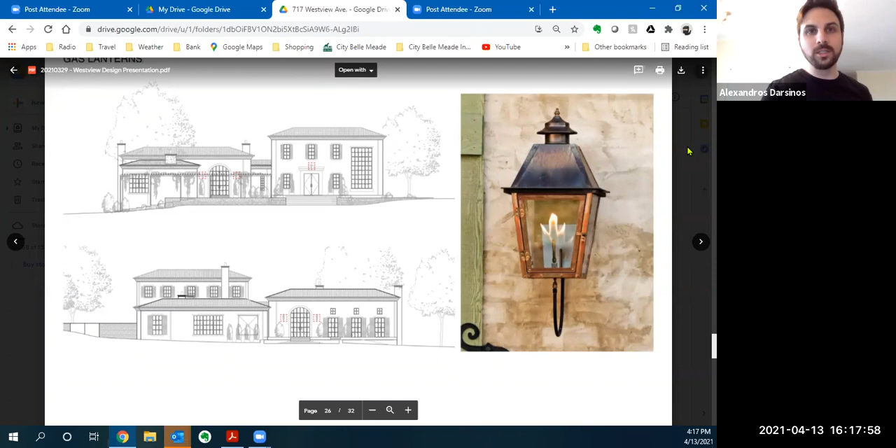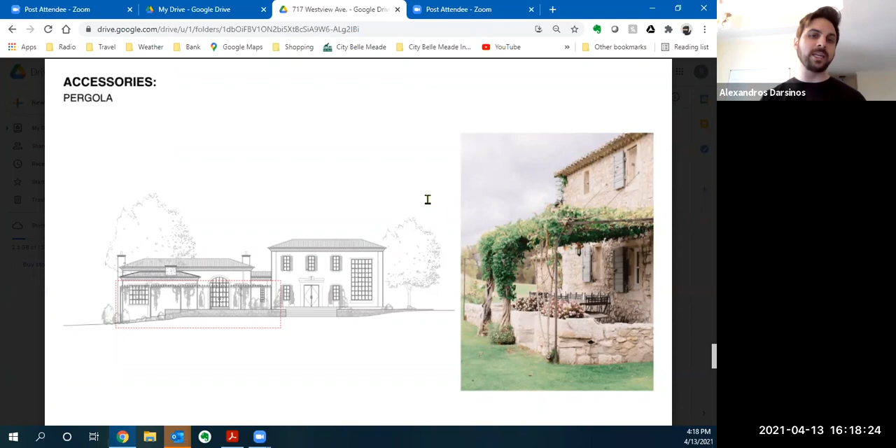The pergola in the front is a light steel pergola that we're hoping to dress in green and vines, to soften up the facade, put your focus on the main building, and create a bit of privacy to the courtyard in front—something delicate and natural, less constructed and formal, playing off this informality and lightness on the front facade.

Ivy walls—on the back facade, especially near the arched covered way, we're looking at ivy on the outside, maybe running slightly into the interior to soften the facade around the pool area, again utilizing landscape as an architectural feature to create character on the building itself.

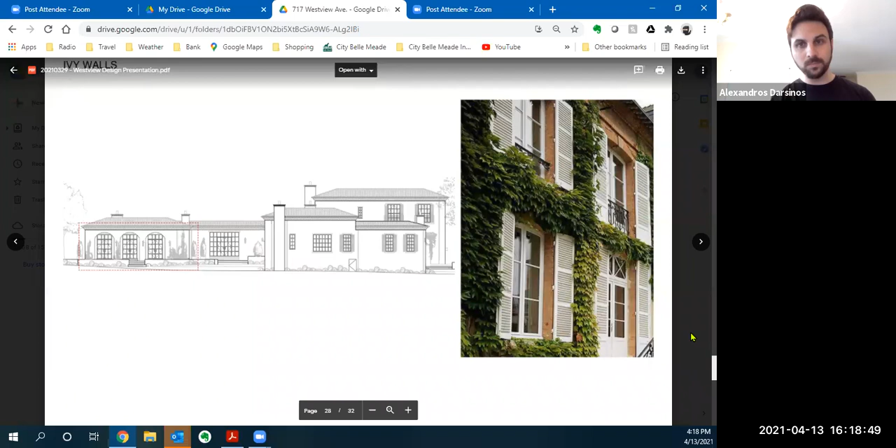Limestone tiles are very typically used here, I believe, around the pool area and the front courtyard. For the driveway, we're looking at fine gravel, quite commonly used in Belle Meade, with an edging of limestone or a sharp edging with a grass condition—still exploring that detail currently.

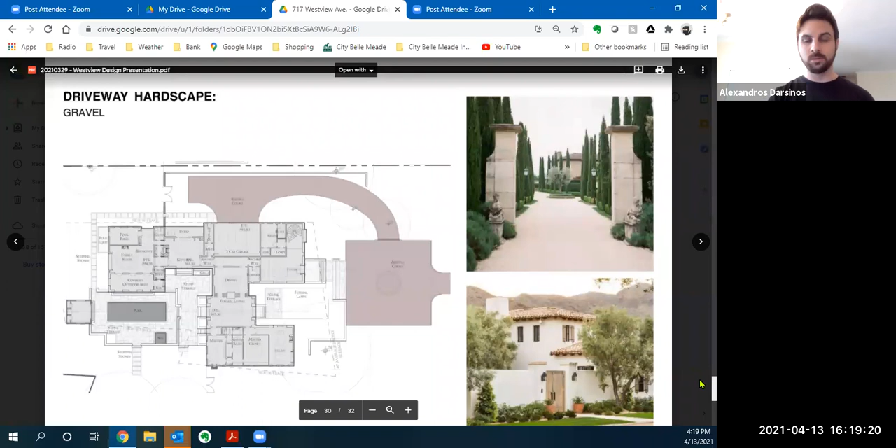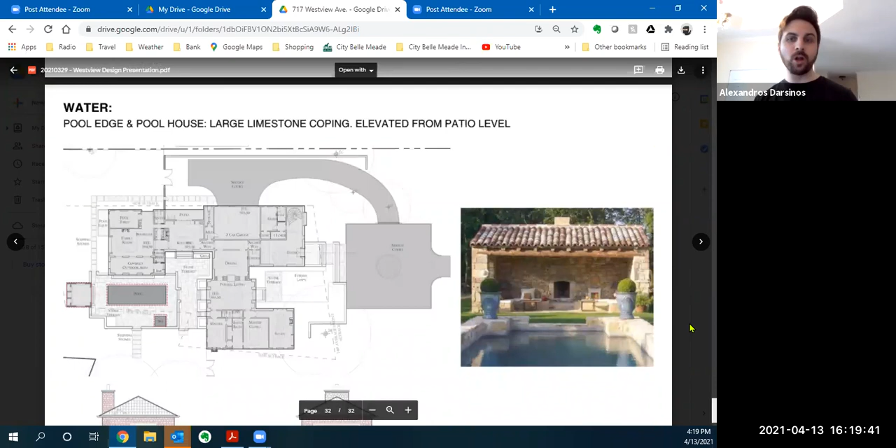The next slide shows the fountain that we didn't express in the renderings in front—a hexagonal fountain that's a bit more authentic and true to the Provence style. And the pool house and water edge done out of strong stone, showing how we're expressing that.

So that's the culmination of the material package. We also have the design development package we can get into, but I think it'd be better to open it up for questions or a conversation, and I can show more specific information if needed for this particular project.

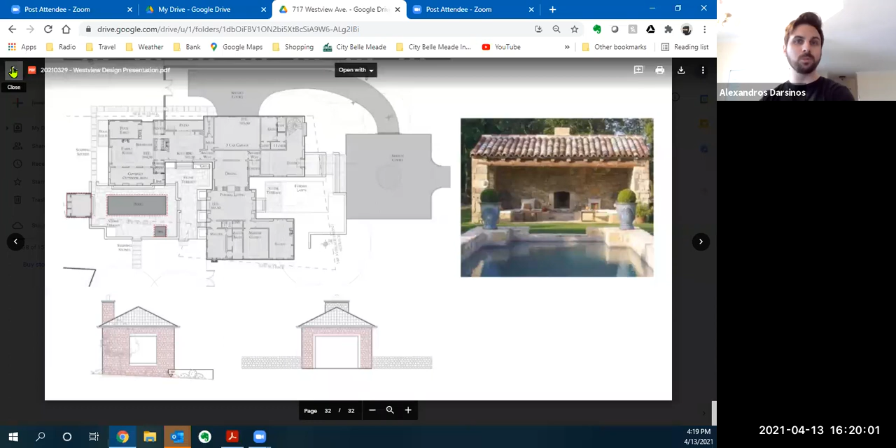I'd just like to say thank you for all the detail you've presented. I can tell that after you came before us last time, you really listened to all our concerns and comments and have addressed those, and I think it's absolutely beautiful.

I appreciate that, Bonnie. That means a lot to us. Very lovely, I agree with Bunny—absolutely addressed all the concerns.

Lyle, can I ask you a question? I know this is a large lot—are there any issues that will go before the BZA besides the pool? No. Okay, we've already had BZA approval, I believe—is that correct, that's my question. Yeah, we went there first before coming to historic last time.

I just want to clarify that the materials sound amazing, I love them—you're saying a lot, we're hoping to do this. So I just want to say that if we approve something with a specific materials list, you'll be held to that, and if you deviate from that, you'll need to go to Lyle for approval—you know, if you change from copper gutters, or from full limestone and different materials.

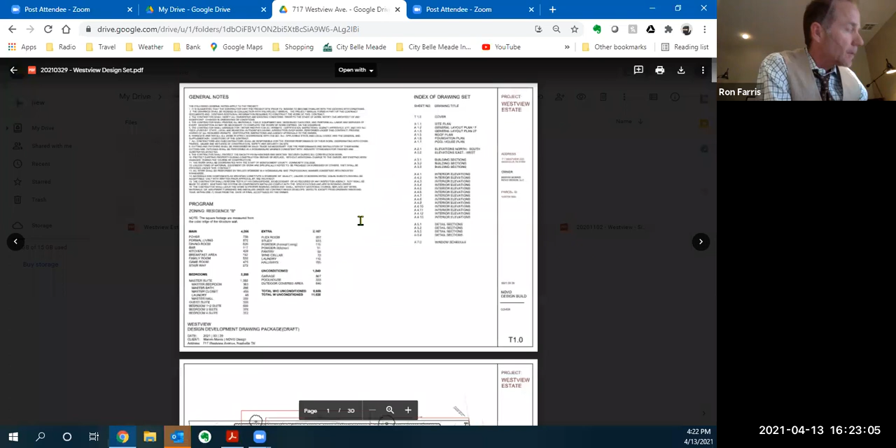I compliment the thoroughness of his follow-up from our first meeting, and I find the cleanup and development of it quite successful. I agree with Jeanette, and I know the applicant knows this, that the success of the project is in the richness of its details. So if it does find as it gets down the road that there are things to be revised, I would ask the applicant to be sure to inform Lyle of that, and I think he'll let the board know. So again, appreciate the thoroughness and the development of the details as requested.

Is there anyone else in attendance who would like to speak for or against the project? Is this the public comment? Yes, ma'am. This is Louise Bryan.

I live at 4314 Iroquois, corner of Iroquois and Westview, about a block down the street. First of all, a very extensive and beautiful proposal. Thank you so much for all the detail. It's really incredible, and I'd be proud to have this in my neighborhood. I did have a few questions about the philosophy of this type of home in Belle Meade.

I appreciate the strong European elements in this design. I see a lot of French, a lot of Italian, and some other designs in there. I do think there's an element where there's some contrived pieces, and I'd like to get the board's opinion on the fountain in the front. I mean, at the end of the day, we do live in Nashville, Tennessee. We don't live in Europe. I understand this is a 2-acre lot, and I just think a few things look a little contrived. I would start with the fountain in front of the house. That's one question I had.